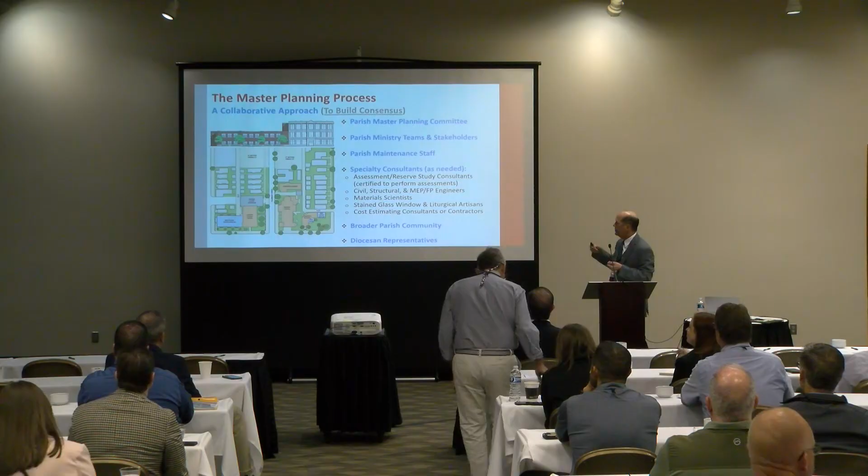Even including the parish maintenance staff and their history of knowledge of the buildings. But even the team that we tend to bring, depending on the extent of the master plan, some do require involvement of assessment consultants and engineering consultants, material scientists, artisans, and then the cost estimating consultants, so that everything we're giving estimates for is as accurate as possible.

But also even the broader parish community and then yourselves, the diocesan representatives, is sometimes overlooked. But we always have to remind our parishes that, hey, the archdiocese or the diocese owns these buildings, so they have to be part of this process. And sometimes we find that they try to avoid that and do projects without the diocesan overview.

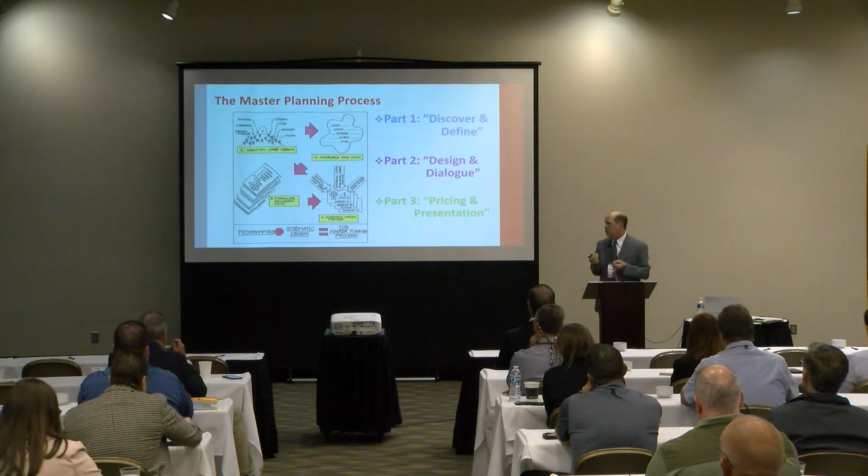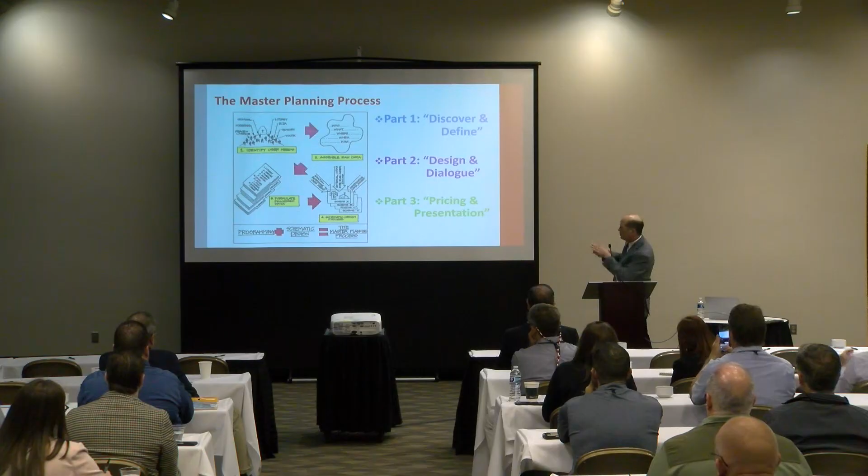About 10 years ago, we decided what's the simplest way we can summarize this process. And this is what we came up with, a three-part process: discovery and definition, design and dialogue, and pricing and presentation. I've color-coded my presentation accordingly. Other architects I've seen use similar processes with different terminology, but this is the terminology we came up with.

I'll start with part 1A, the discovery phase. That's really assessing the existing conditions, not only the physical conditions but also some of the challenges that parishes, schools, or clients have, including circulation problems.

I'll start here with more on the health, safety, and welfare side, the actual facility assessment and reserve studies. We've done this a number of ways ourselves, but in some cases, if it's a large campus or our team isn't necessarily the right fit, we bring in assessment consultants. One of these we'll see a little later here.

These are some documents from these assessments. We even start with a questionnaire before we begin the assessment, about the history of the buildings and any data they might have, including a questionnaire about handicap accessibility. These are just some of the highlights without going into detail.

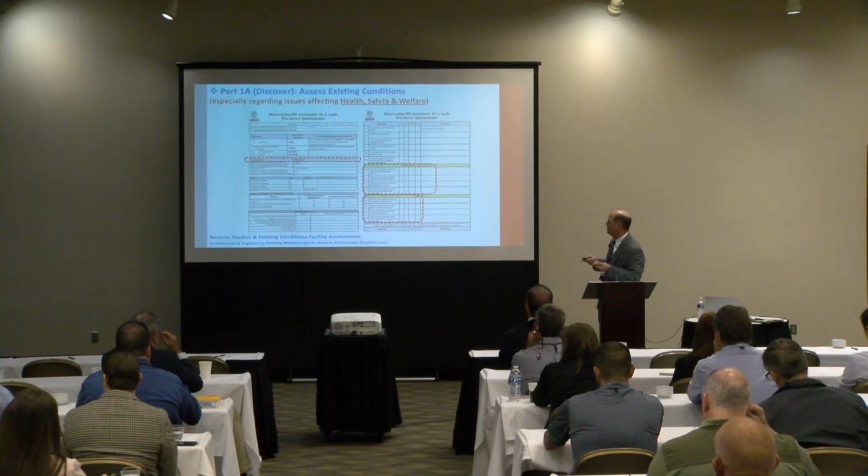The reserve study or facility assessment evaluates all the existing conditions, interior and exterior, especially regarding life safety and handicap accessibility. So thorough walkthroughs with ourselves and any engineers involved.

There's another talk going on right now specific to that, but this is a quick overview because it's a key part of a master plan. The worst thing we want to do is master plan for improvements that disregard maintenance issues and leaks in the building. We've seen buildings beautified over the years, but they didn't repair the roof leaks, so the new decorative painting in the church gets damaged because they didn't do a facility assessment to start with.

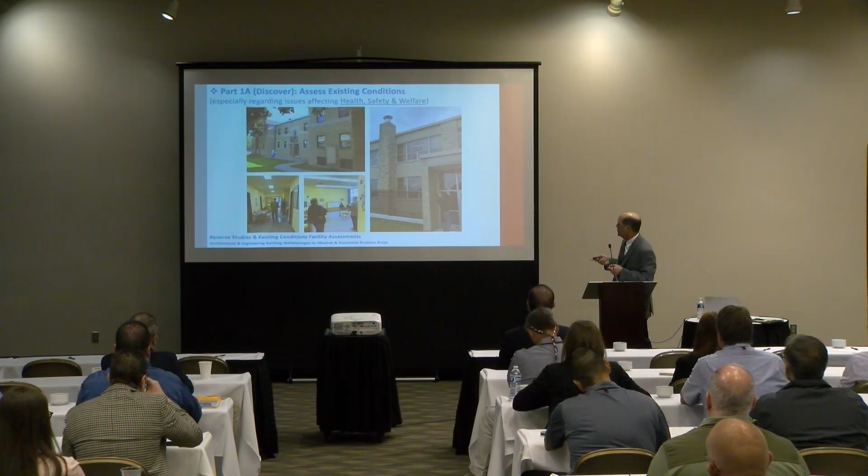Some of these images are all from the Cathedral of Indianapolis. We did an 8-month master planning process, long range.

These are specific zoomed-in photos that, in this case, an assessment consultant did with us, even highlighting health, safety, and welfare issues like exposed conduit and exposed cloth wiring—things that really need to be addressed and included in the cost estimating.

We also have artisans look at the stained glass windows and things like non-code-compliant kitchen hoods, which is a very common thing we find. And then, of course, all the masonry and roofing conditions that are letting water into the buildings.

With our engineers, they do their own specific assessments of all the mechanical, electrical, and plumbing systems, and we go up on the roofs. We have to cover as thoroughly as we can the conditions of the building, so we're fully informed as we start the design process.

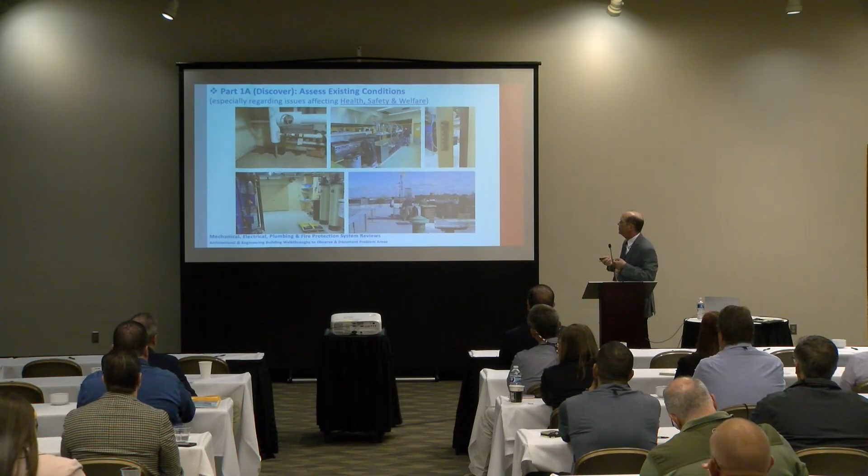Regarding handicap accessibility specifically, some of the things that aren't necessarily upfront or given to us as goals, we recognize as challenges when we start these master plans or schematic designs. This is one specific project with Brother John at the Dominican Priory in St. Louis that we're currently working on. One of the challenges is they have a handicap accessible entry, but it's not the main entry.

So they have an elevator here that was added, but their main entrance that most people come to for the first time still has these grand steps. So how do we navigate that? And how do we address that? And there's even steps halfway up this main corridor to the chapel, where most people go. So that was, we had a lot of discussion about that, but it was those initial walkthroughs where we noticed those things.

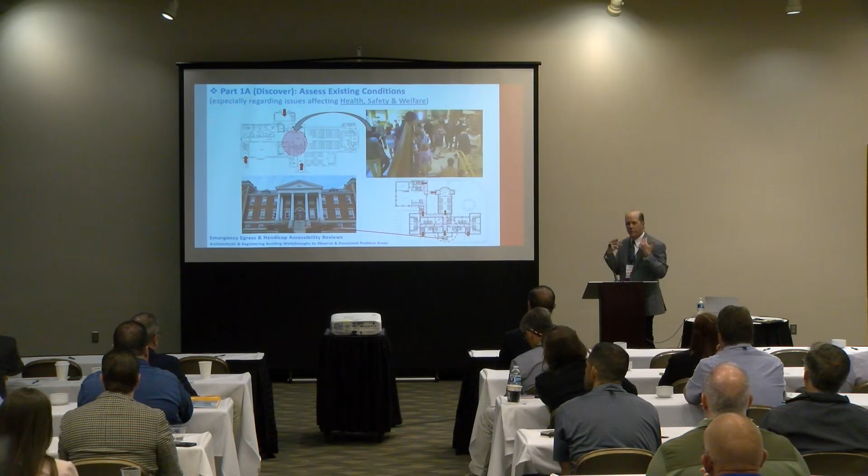This picture in the upper right is an example of a bottleneck condition that a particular client wanted us to address. They weren't sure what to do, but we had to go observe it in person, so we tried to go to liturgies or services. This is a Protestant church, right after one of their services. People are coming in and people are coming out, and they didn't have handicap accessibility with this grand stairway here. So we had to find a way to solve this design-wise, this bottleneck, but also the handicap access. Seeing those in person just brought it to life for us and really showed us what a big problem it was.

There were too many obstacles structurally and challenges, but it at least ruled it out, because if people ever asked, did you ever study that? Yes, we did. We did our due diligence, and it's not an option. So we had to find other ways to provide this large gathering space for the Cathedral of Indianapolis.

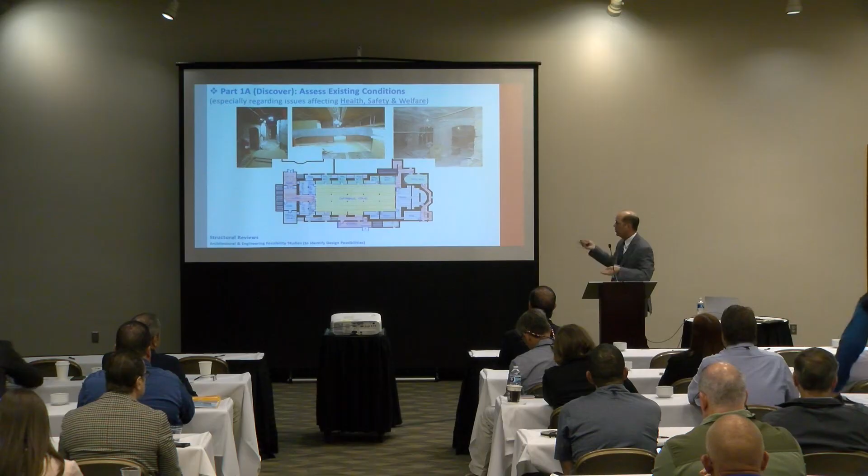And then, of course, all of those assessments, one of the key parts is a 10 to 20 year plan for how much money the parish or diocese has to raise over time to pay off and take care of those long-term maintenance items. In this case, at the Cathedral of Indianapolis, it was close to $5 million of work over a 20-year period. So long range, but significant deferred maintenance, and we had to keep that in mind as we designed the long-range master plan.

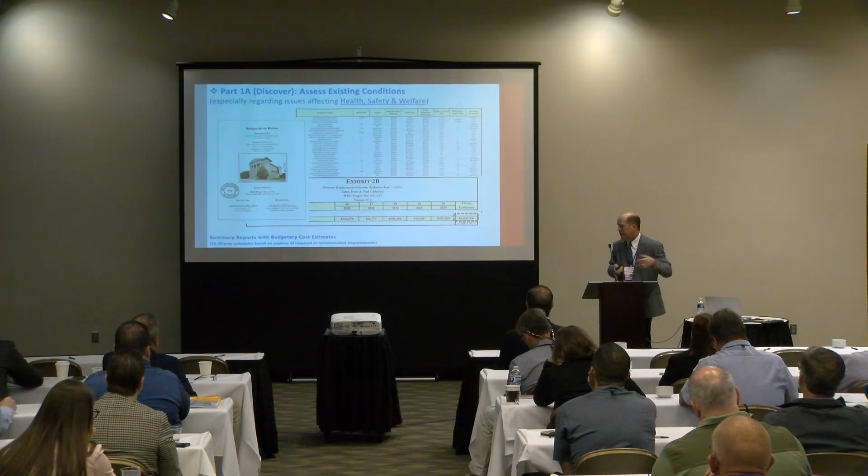This is one for a high school that we did near our office in Chicago. This is Bureau Veritas, the consultant I was referring to that does national facility assessments. What's unique about them is they have an online system. All of their facility assessments go to an app that facility managers or the parishes themselves can use to update as they do work, and they can keep it all online in a system that we found really made a lot of sense with current technologies, as opposed to just the bound assessments that we're typically issuing at the end of the process.

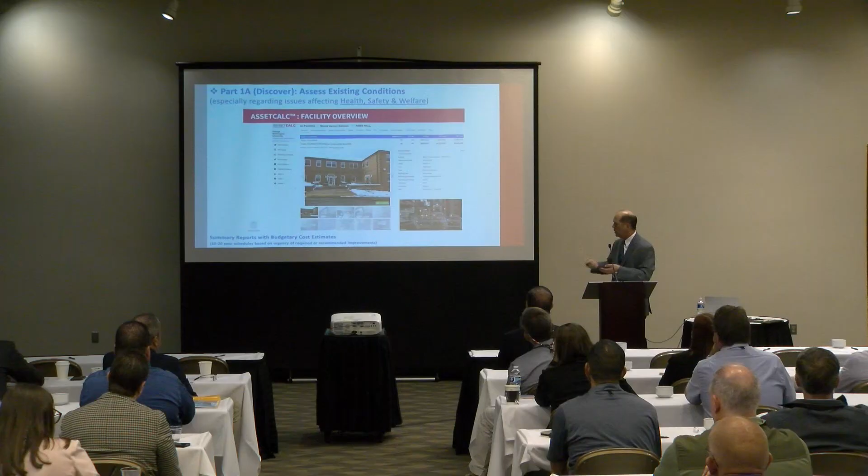Okay, so that's the discovery part of part one. Now we're in the definition phase, where it's really working with all the user groups and the building committee. Again, this is where the consensus building really starts in our process, with all the questionnaires and meetings face-to-face. So distributing hard copies, but also issuing digital copies. Sometimes we do Google Docs polls, which for people that aren't comfortable coming in person, makes it much easier to get information and feedback from them digitally.

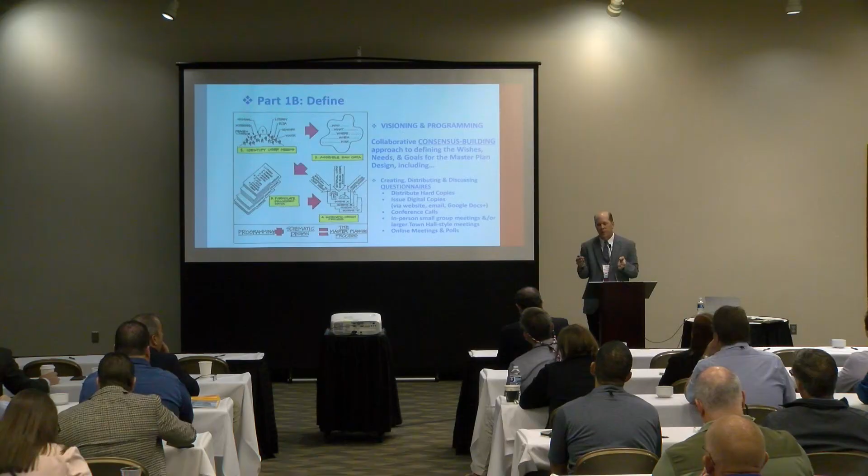So we used all of these methods at the Cathedral of Indianapolis's master plan, and gosh, we had so much information that we had to decipher, go through, and summarize. But it was really key to building that consensus. Everything from conference calls to user groups of 6 to 8 people, to town hall meetings in some cases for various projects. We'll do even a town hall at the beginning before we start the design. So really, it's different for every client we serve, depending on what the specific goals are.

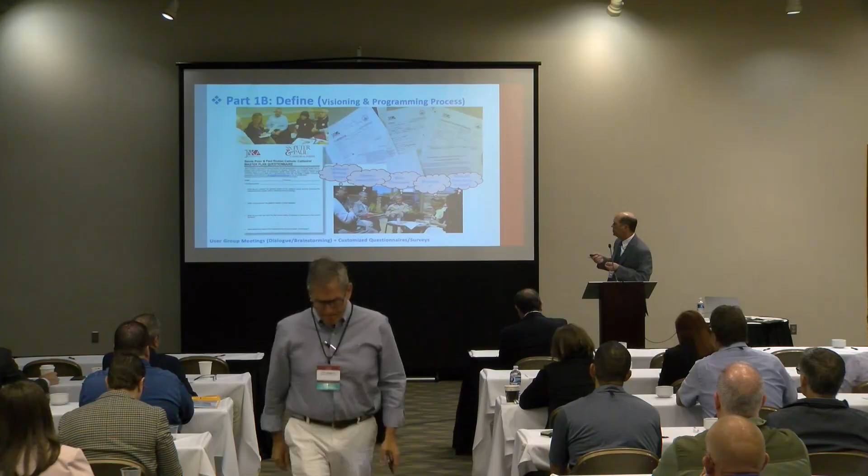And just some images of our questionnaires and sit-down meetings we've had. Again, sometimes these are put on the websites, sometimes they're mailed out, and then we get them all back by a certain date. But another thing we often do—in this case, this is a brand new church in the Kansas City, Kansas Archdiocese.

We actually issued floor plans, kind of diagrammatic from other projects we've done, to get feedback on traditional layout of seating and traditional location of tabernacle in center, or slightly off center but prominent, just because they're a unique parish that we're serving that's half Hispanic, half Caucasian. So the pastor really thought we needed to put these questions out there visually more so than just a narrative.

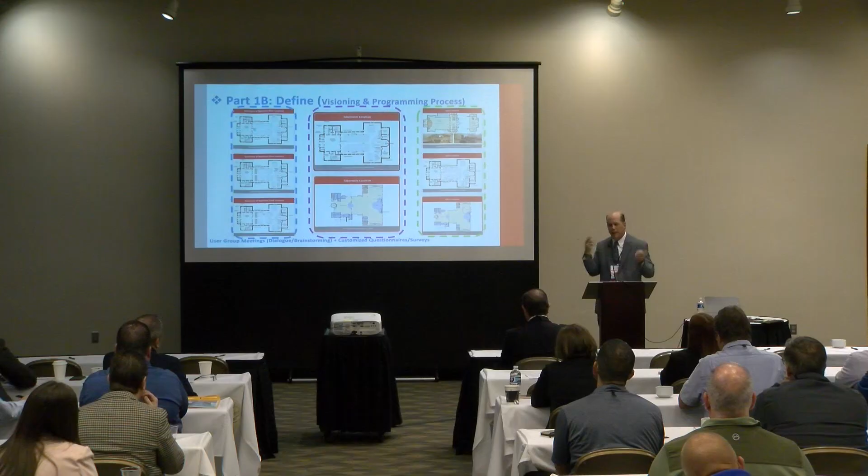So we did one for the location of the baptismal font and got answers back. We got one for the location of the tabernacle and even the choir location, and got a lot of data and feedback from each of those. Even though those aren't specific designs for their church, it just helped people visualize, and made it easier for them to understand and answer the questions of our questionnaires. This is just an example of one of the actual questionnaires for that project.

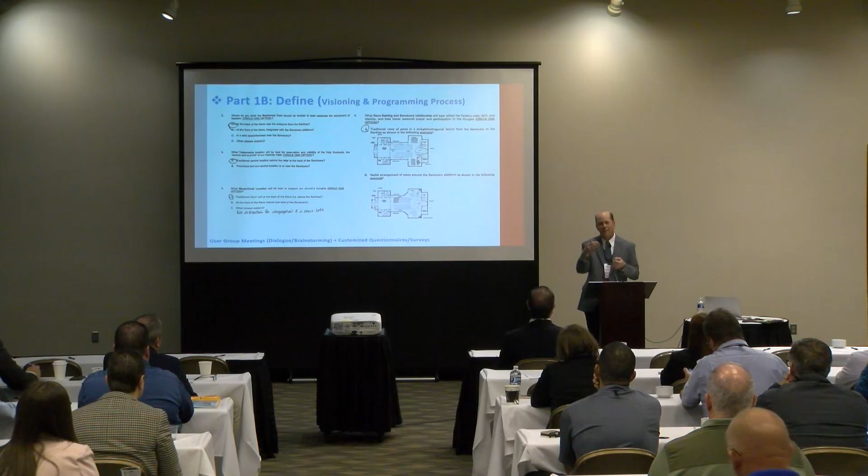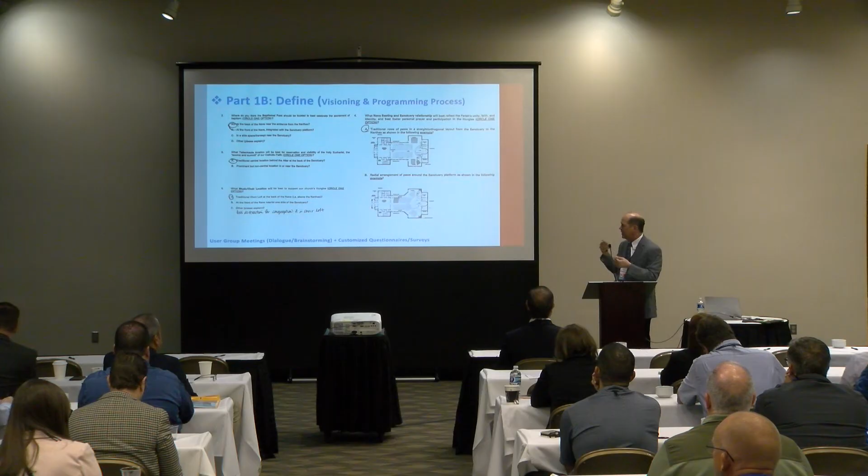And then Fernando, being bilingual, because they had so many non-English speaking members of their parish, translated those documents. So we got a lot of things back in Spanish. Having someone that can communicate with people that aren't necessarily strong in English has also been very helpful over the years. Fernando can instantly translate as he hears the speaking, and it's really been helpful for some of our church clients that have a high Hispanic population.

And then after we get all that data, we summarize it, and we do our best. It's always a big challenge: how do we succinctly summarize the highlights of all this information we're gathering?

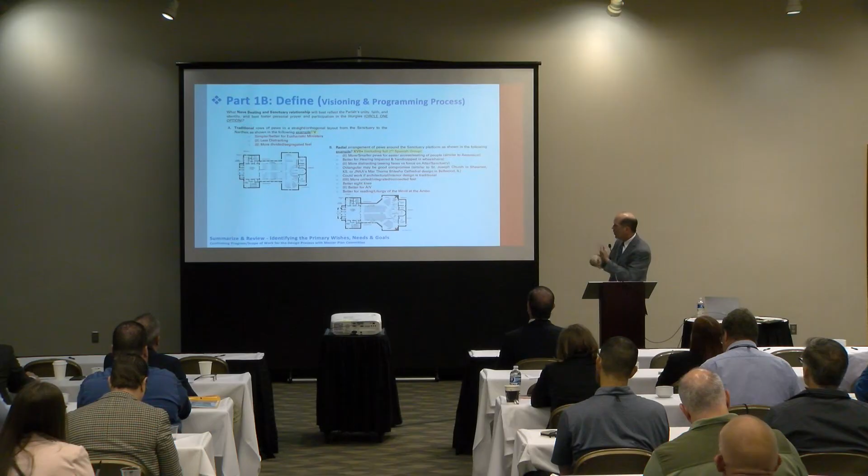And then in some cases we do quantitative analysis, so highlighted are the number of comments specific to a certain response. Without going into it, this is how we summarized all the data we got for that particular project.

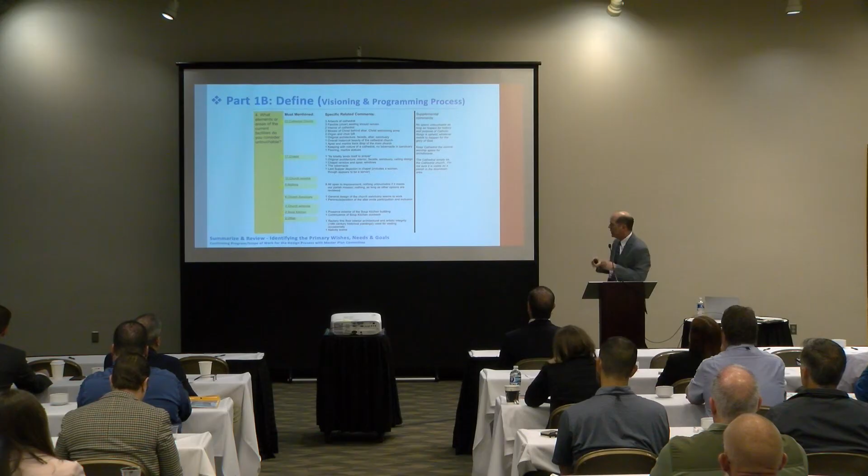And then for the Cathedral of Indianapolis, we did it a slightly different way. It's really catered differently for each project. We don't have a cookie cutter way to do it, because each project is unique. We've found how to best summarize each specific project in a way that makes sense.

And then we also summarize in some of the diagrams before we met with the building committee what we heard, and we point out what the preference was. In this case, with all the data we got, the preference was for radial seating as opposed to straight pews, and a choir loft, but a secondary choir space down next to the sanctuary because they have a Hispanic choir with contemporary instruments, but they also have a traditional choir that prefers to be in the loft at the back of the church. And then tabernacle location in the center, and the baptistry at the back, at the entrance.

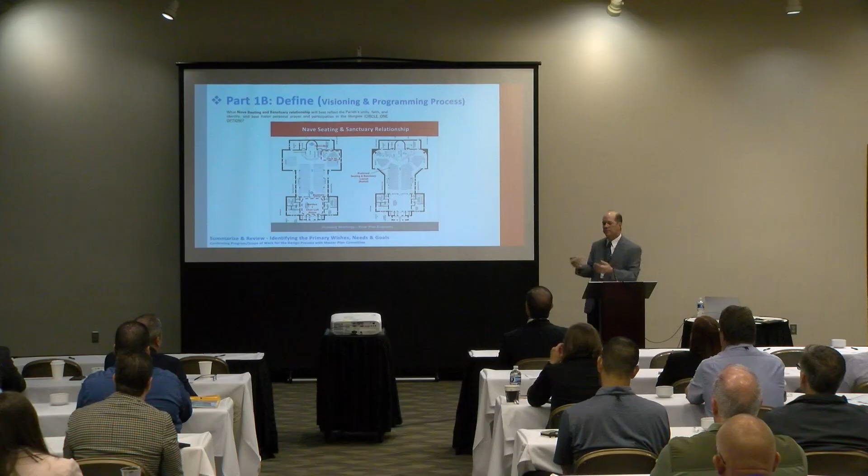So that was the summary of the most comments that we received, and that ultimately led to helping us efficiently design the new church.

And then we've also done these photographic summaries, overlays, and little bubble diagrams - in this case for a girls' Catholic high school, including handicap accessibility and just bringing an old building up to current codes. Life safety and handicap accessibility was one of the highest priorities in this case.

And then we even did a floor plan summary for them. All of these diagrams are really to get that core building committee's approval before we start design - confirming this is what we heard, and is this what you are giving us authorization to then start designing toward? In some cases, they'll say no, we ruled that out years ago, we know we've already studied that. But it's basically us summarizing what we're hearing.

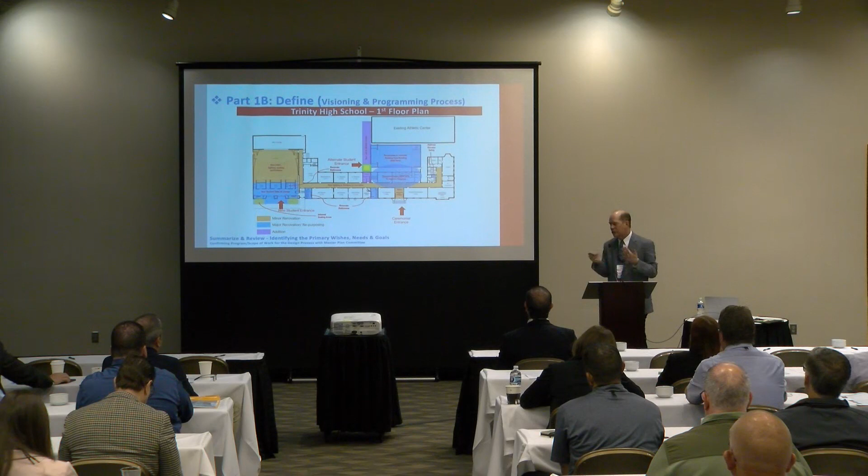It's very rare that we're overruled. Typically they defer to what the data says, because if they want to build consensus, they've got to listen to all the groups as well - the parish, the school, or whatever the group might be.

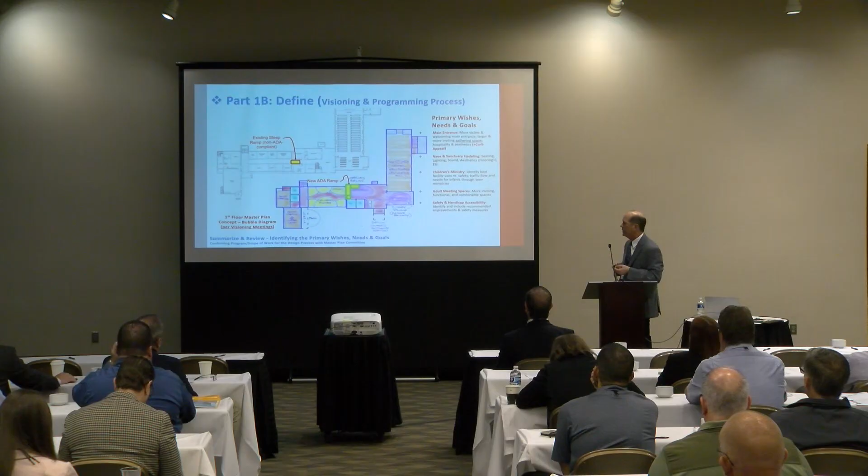Just a few more examples of very simple bubble diagrams - these are digital sketches over a digital floor plan. In this case, one of the big problems was handicap access - this terrible, very steep ramp right off their main corridor. So in addition to repurposing a lot of spaces, navigating that handicap accessibility was something we really had to identify right up front and confirm was a high priority from all the information we received through the visioning process.

This is a site plan diagram I did to summarize the new church in Kansas, probably our earliest site plan. Their original civil engineer site plan for zoning had the church oriented just parallel to the school. With all the feedback we got, this is the idea I came up with - it really wants to have a more prominent entrance that addresses the entry. This was a simple way to express that before we launched into schematic design.

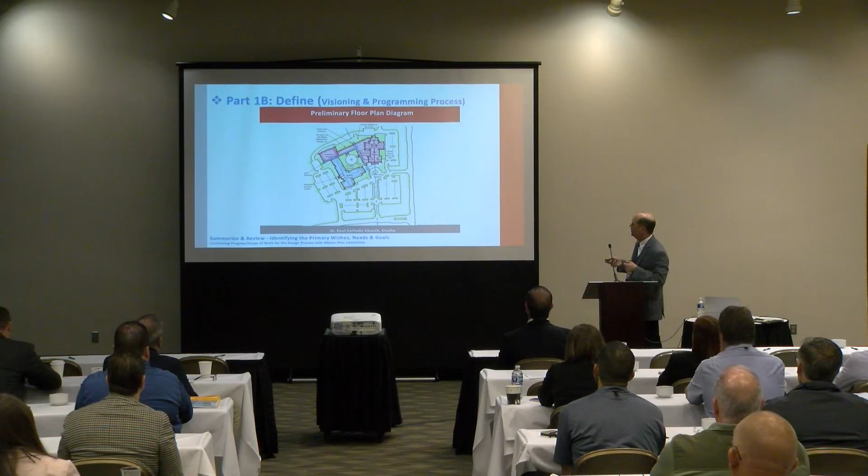We also do, not all the time though - we don't always do a program specific to each space, I'd say about 50%. You'd think entering the profession that a building program was always a given, but it's amazing how often that's pretty general. In this particular project, we did have a very specific building program because it was a brand new building, so we had to identify all the square footages of every space that was necessary.

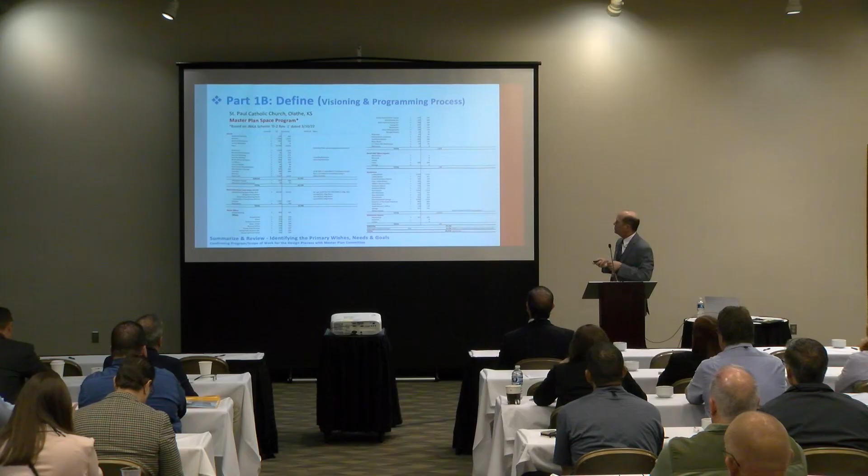So that's the visioning and definition phase. Once the building committee or diocese approves that, we get the go-ahead to develop the design phase, the second step in our process. That's really where we go to the drawing board and start to develop our initial conceptual designs - the part architects are typically known to do.

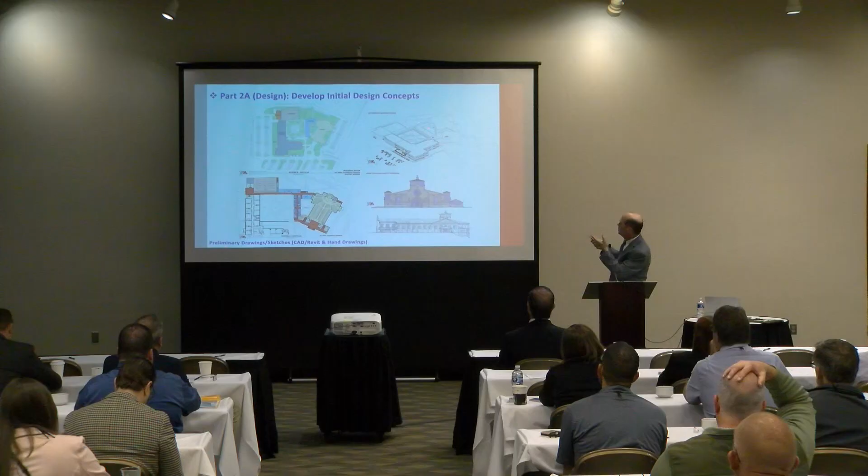For most of our projects, I still work by hand digitally on tablets, but most of the younger architects now go right on the computer pretty quickly, especially with a basic concept. These are examples of things we've done to prepare for first design review meetings - site plans, floor plans, and conceptual elevations. These are scanned hand drawings for a brand new church, the church in Kansas, with simple massing studies for how a new traditional Catholic church would relate to an existing school building.

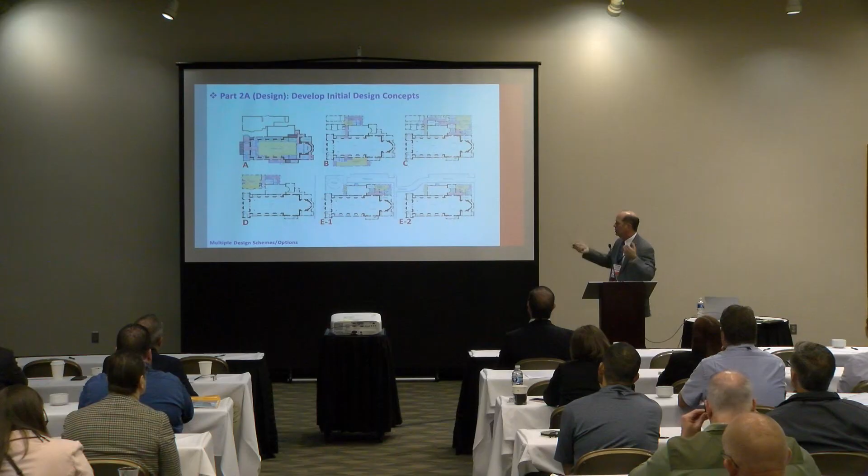We also typically develop multiple schemes, again to build consensus - we have to provide options to give people more ideas to respond to. We've found we just can't come with one idea, because it's going to take longer if we just say 'this is the design, how do you like it?' We've learned over the years that we've got to bring multiple schemes. For the first design review meeting for the Cathedral of Indianapolis, I developed 6 schemes, which is a little excessive, but there were all these ideas from the visioning process that we had to translate, if only to rule them out. We felt we owed them this range of ideas at that first meeting, considering the long-range goals of this project.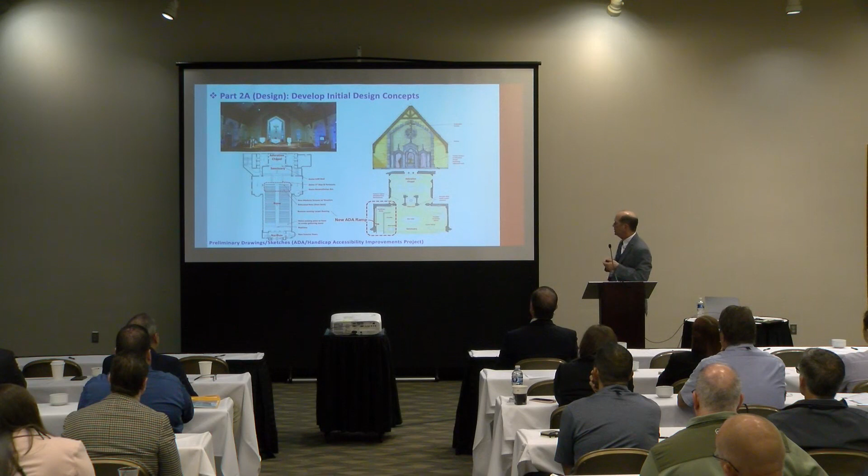In terms of this church, handicap accessibility to the sanctuary was a significant issue, but also removing a very modern intervention after Vatican II, including this reredos wall in a traditional Gothic church that they wanted to remove, wanting a reredos more in line with the original design of the church. These are our initial sketches to get those ideas on paper and start addressing some of the accessibility needs and how that gets integrated with the design.

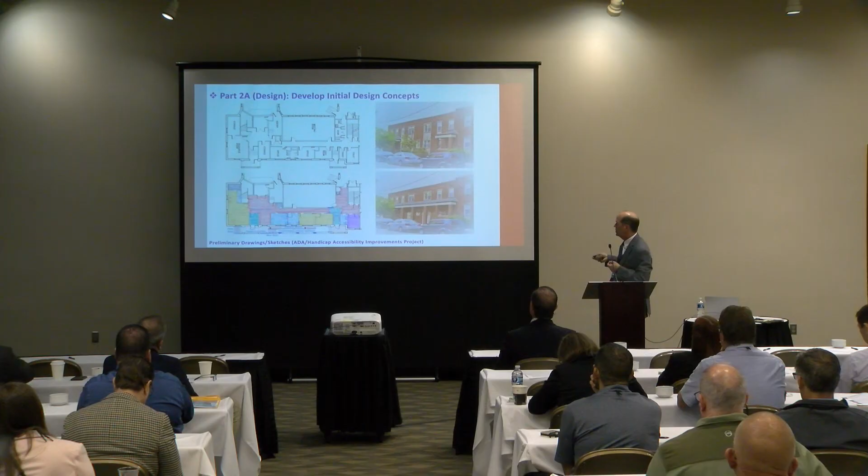Another range of sketches - photographic overlays, floor plans, etc. Another one where handicap access was a major issue - they have steps right inside their vestibule and a step here. How can we make this a handicap accessible lobby into their daily chapel? This was just a conceptual idea at the very beginning.

And then a full accessibility project, in this case an elevator addition. So in some cases we go right to our BIM program, Revit, because we had a very clear idea from a very simple sketch, and it was very floor plan driven. At our first meeting this was what we presented, because it was simple enough that we could jump right into using Revit to develop this idea. And that's the elevator tower, of course.

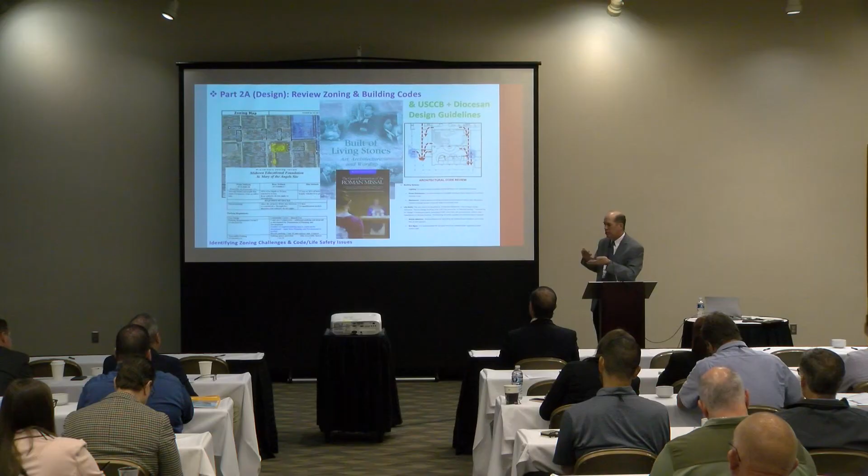Concurrent with developing those initial concepts, we have to be sure, as architects, we meet zoning, building code, but also the diocesan liturgical requirements and the USCCB Built of Living Stones requirements, if it involves renovation of a church or a new church, et cetera. That's happening in parallel, because the worst thing we want to do is show something that doesn't meet those requirements and then have to make changes down the road. So that's part of our process too.

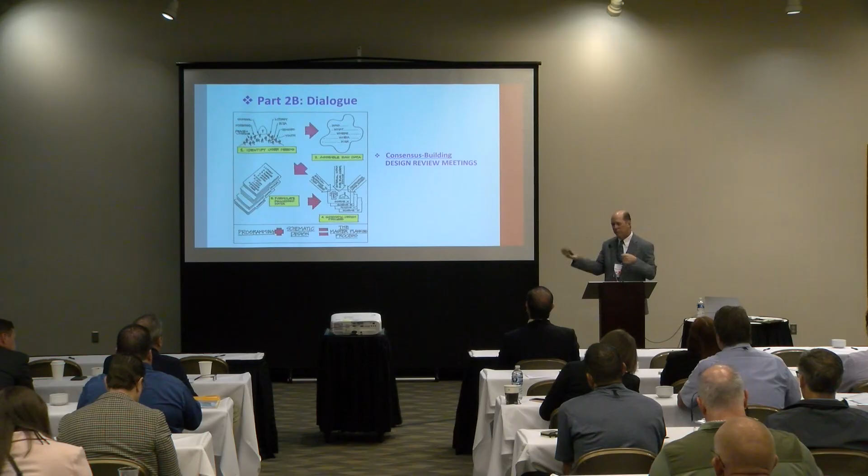After we develop those concepts, again focusing on consensus building, we hold design review meetings. We typically propose at least three for a significant size master plan. In Indianapolis, we ended up having four over, I think, four or five months, where it's back to the drawing boards with comments, then come back again three or four weeks later. So it's very collaborative with the building committee, once again, all focused on building consensus.

Just some examples, this is a really old one from before I even joined the firm, back in the day of pinning up the drawings and vellums on the walls, to obviously doing things online now, using our laptops and presenting digitally. But basically using whatever the best technology is that we can use to convey the ideas and get the feedback that we need. And at those meetings, we mark up our drawings.

These are literally some of my markups of feedback I was getting from the building committees, just having dialogue with them and listening to ideas that different building committee members have, all towards building consensus.

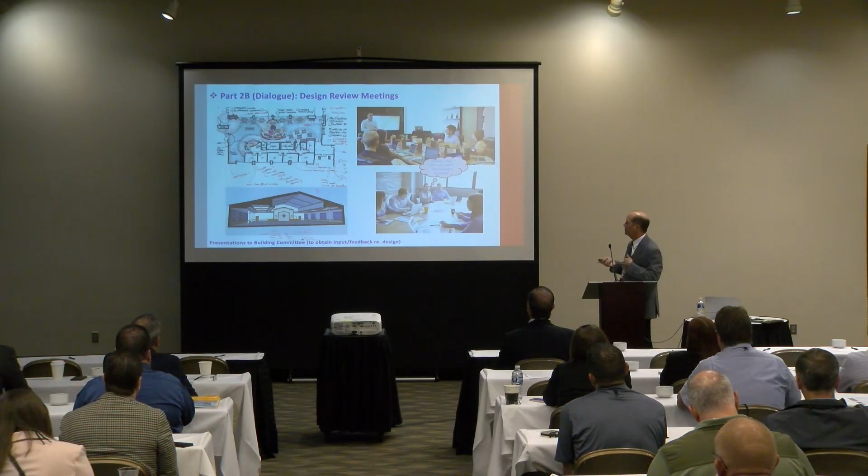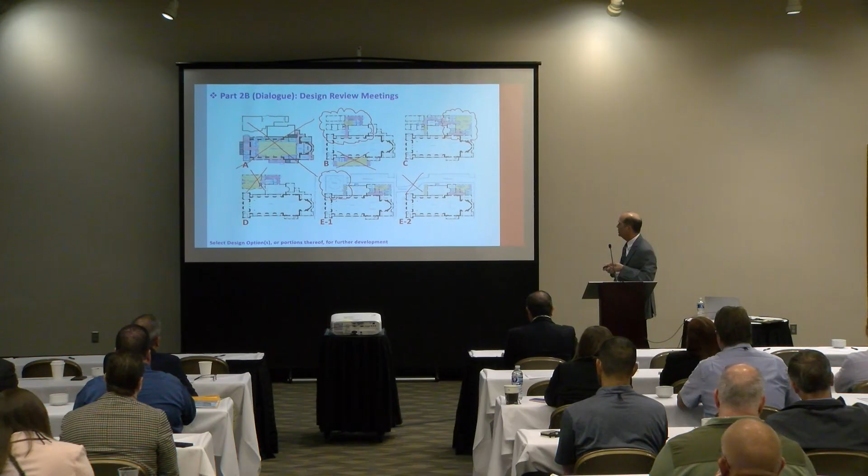In the cathedral's case, there were pieces of different schemes that different people liked. This is just my markup from that first meeting, and the final scheme ended up being parts of different schemes.

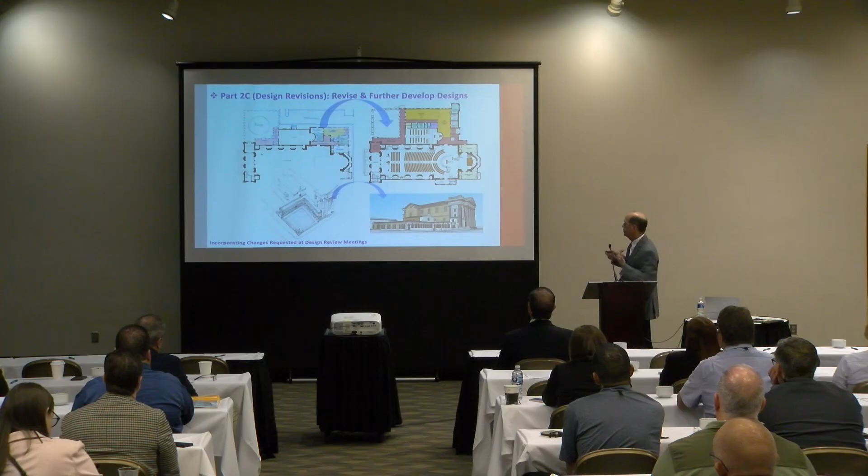Hand sketches, and this is the Cathedral of Indianapolis once again, become 3D modeled computer drawings. And then those ideas change pretty significantly — this evolved a lot over time.

This wasn't a dramatic difference between these two meetings, but you can see how it got more and more detailed, and the colors and finishes were a big discussion point. Going from stone to wood was a big decision. And then how does that ramp get integrated so it blends in with the architecture, because ramps are hard at sanctuaries to hide, and that's a common challenge we have to integrate sensitively.

Even this elevator addition didn't change a lot, but developing the exterior paving there to make that a destination in itself before you even go into the building was what came out of that first meeting.

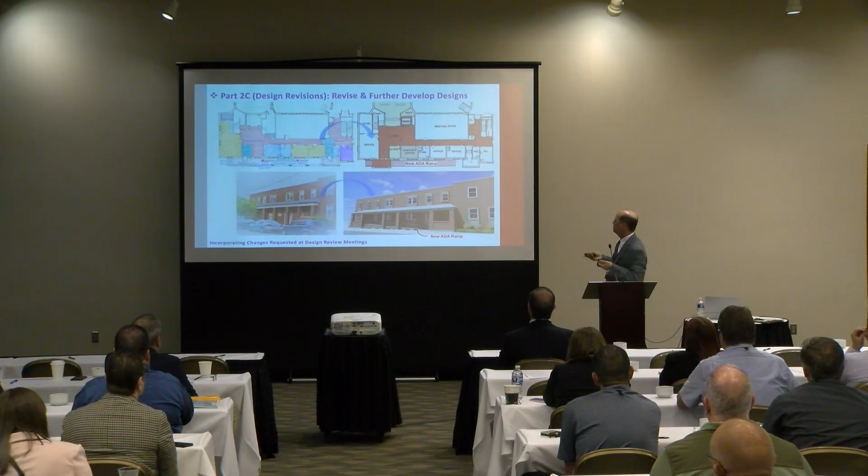And then just how these other projects evolved as well — how does this ramp look behind these cars? I didn't show the ramp, but this view obviously conveyed that idea more clearly visually. And they ended up adding an elevator inside to make the whole building accessible in that case.

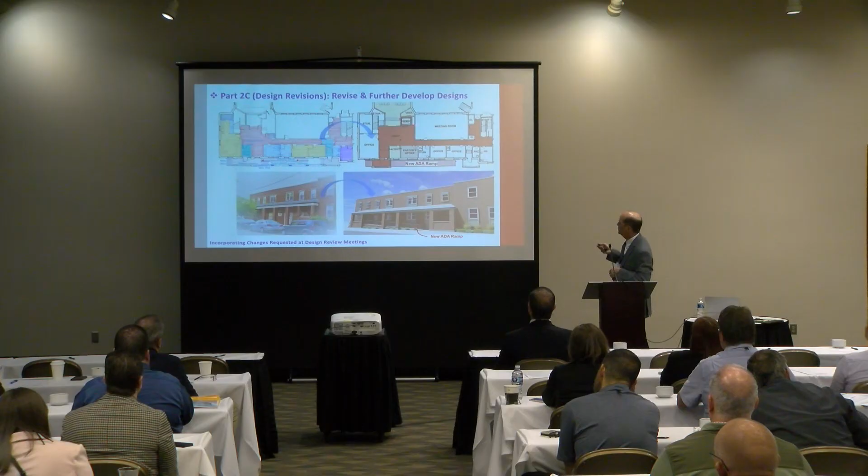And on the new church in Kansas, it went from just the church elevation studies to the full master plan studies of how the other buildings looked on the outside, now that they were happy with the church. So we had to do preliminary sketches of the entire campus, of what's expanded in that full master plan.

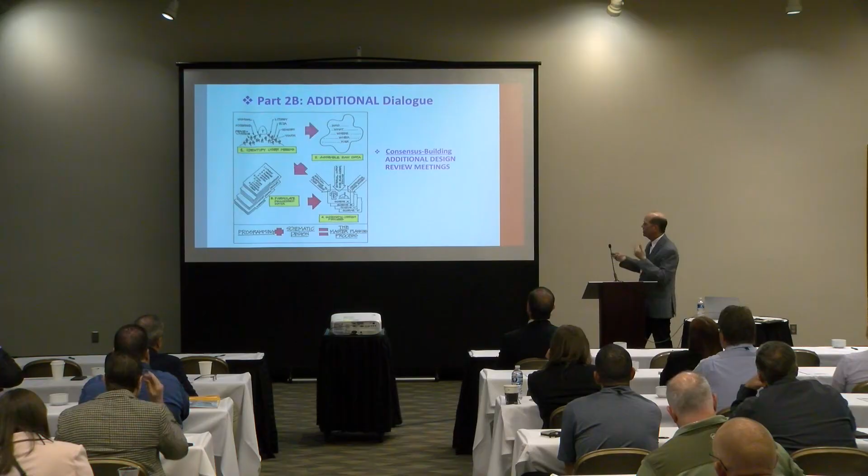And then, as I mentioned, we go back and forth, having those additional meetings to review those again and get more feedback.

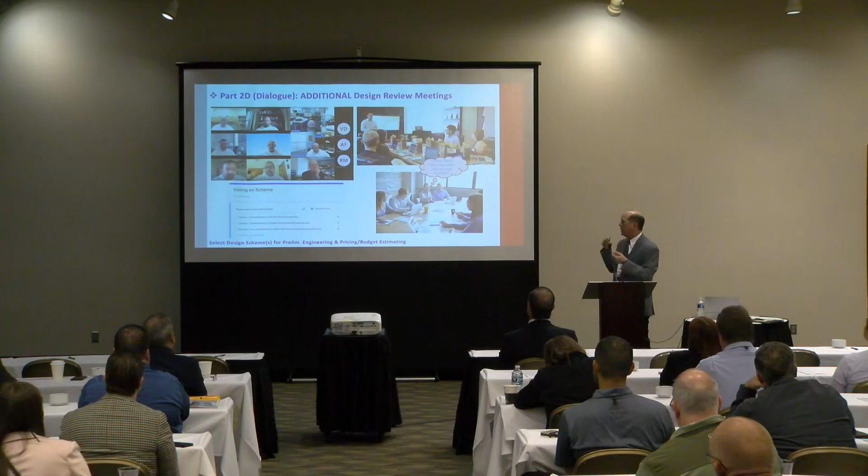And more recently, since COVID, we've been doing more and more of these online, especially for projects where we're not physically in the city we're working in. It's been amazing—I assumed in Kansas I'd be going there every other month or so, but it was better for them to meet online. As a committee, it was more flexible for them.

Brother John and his group from the Southern Province and the Central Province, the Midwest Province of the Dominican Order—this is their group from two provinces, about the project we're doing in St. Louis. One unique thing we did with them was an online poll live during a meeting, to achieve consensus on a major decision: should each of the bedrooms have a private bathroom, or do we do dormitory style bathrooms? The live poll helped them make the decision for how we should move forward as architects on the design before the next meeting, which is next Monday.

And then the ultimate end at the last design review meeting is deciding which schemes you want us to do a cost estimate for—that pricing exercise. Often we're asked to price two different schemes, because they're still not quite sure which scheme might be the best.

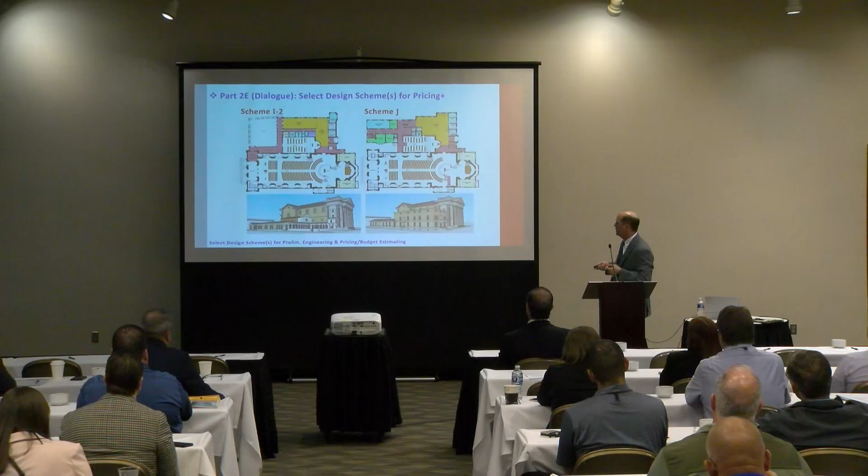At the Cathedral of Indianapolis, we actually priced a scheme that kept the rectory and renovated it, bringing it up to current codes and addressing all the deferred maintenance, versus the idea of demolishing it and opening it up to create a little mini St. Peter's Square at the corner as an entry to the cathedral. So we got full estimates for both of those schemes.

And back to that school project, traditional or modern—they actually said it might be too expensive to do this new building, and that we should price an option to do it as an expansion of their current building. So they asked us to do another little master plan concurrently and price both options, because this just ended up being way too expensive for that particular parish.

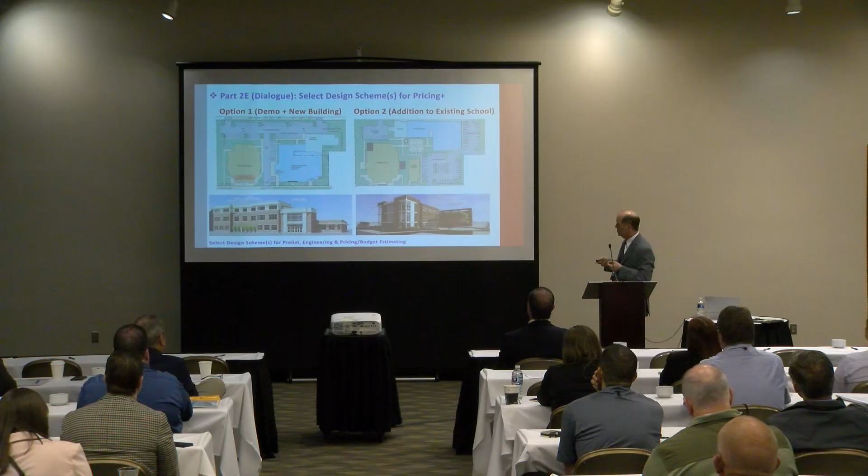And this is for my own parish—just some of the renderings we did for the pricing exercise there, and also for fundraising purposes, both interior and exterior.

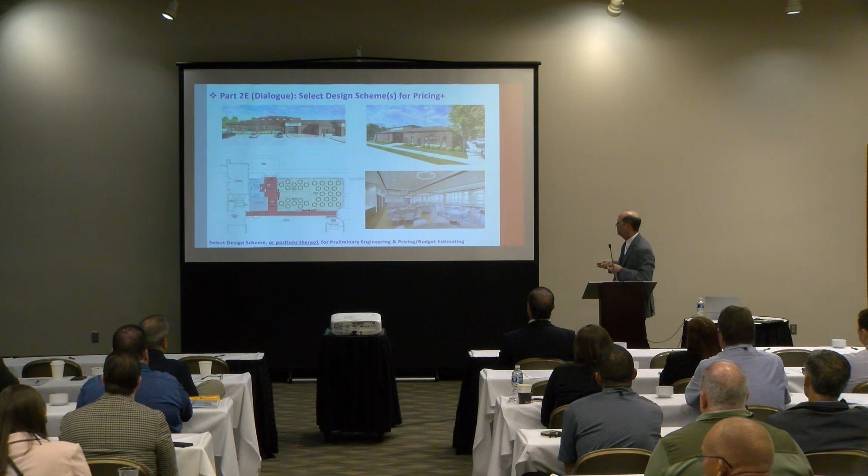And then all of that leads to doing those preliminary cost estimates. But a big important part of that is doing a basic level of engineering, so it's not just a cost-per-square-foot budget estimate—we typically try to get design-build mechanical, electrical, and plumbing engineers to do basic conceptual estimates.

And in some cases, for larger projects, we have consulting engineers do preliminary concepts, just so it's a bit more thorough of a cost estimate from the contractors.

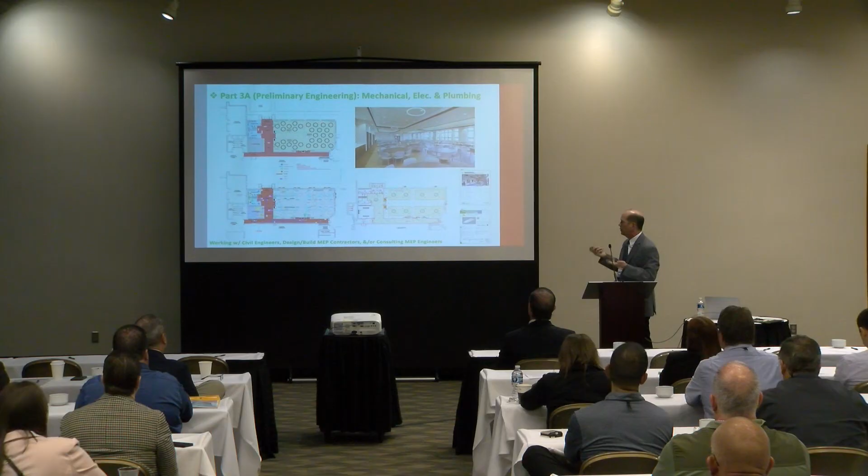These are some examples of the mechanical, electrical, and plumbing drawings that these particular contractors did for us as part of that process. For the new church in Kansas, our mechanical engineer did zoning studies showing all the zones, plus very traditional MEP concept drawings.

And similarly for civil engineering, just some of the basic grading and utility plans, and some graphics—in some cases the engineers help us with the budget estimating. Our civil engineer, in this case, gave us budget estimates that simplified the cost estimating process.

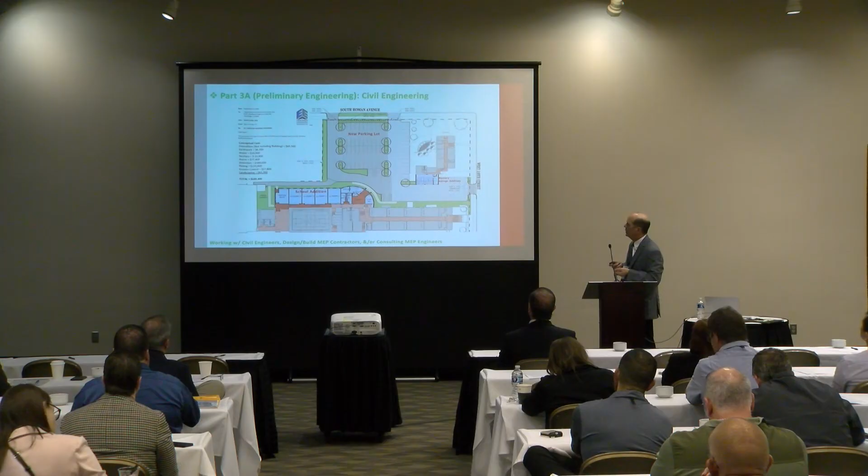In more cases, it's typically working with a general contractor that's qualified to do these types of estimates. For the Cathedral of Indianapolis, Bulley & Andrews, a regional contractor based in Chicago with an office in Indianapolis, did very thorough estimates based on floor plans, elevations, and 3D models, with a lot of back and forth by email. This is one of 15 pages of breakdowns.

So this is just a brief summary of the numbers.

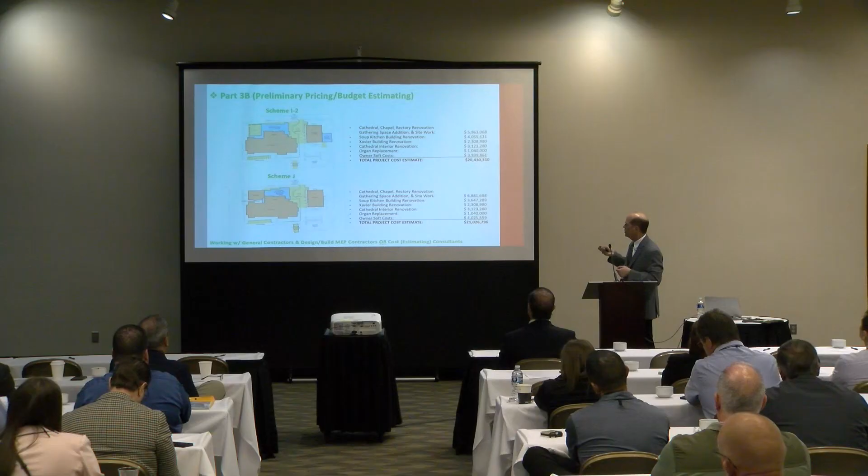Then there's phasing. How can this project, not being built all at one time, be broken into phase 1? The sequencing comes from the contractor's input on the best way to achieve this goal over time methodically, so we don't have to undo work in phase 2 that was done in phase 1. That's another reason we recommend getting contractors involved early, because they add a lot to those decisions and conversations.

How do you engage the contractor? Do you pay them, do they get a contract for pre-construction? A lot of contractors we work with are willing to do it on a pro bono basis if they have a chance to build a relationship, are considered for pre-selection, or know they'll have a leg up on competition if they bid later. But we typically encourage our clients to pay them for their effort. I'm amazed how often they say no, they want to build a relationship instead. In some cases we work with a cost estimating consultant to avoid that.

In the Kansas case, we actually did both. They initially worked with the contractor that built their school, but later asked us to bring in an independent consultant for a later estimate during schematic design. They just weren't comfortable—they thought they were asking the contractor to do too much work, and we agreed. In the end, that contractor didn't even get the project, so it's good they didn't keep asking them for estimates.

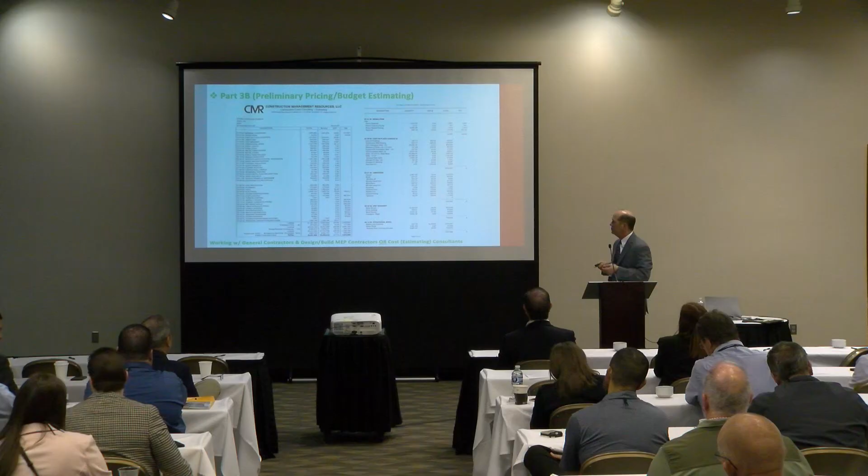A big part of the estimate is also all the soft costs that a contractor isn't going to estimate—that's where we and our design team come in, so you have a total project cost estimate instead of just a budget estimate for hard costs. We've seen soft costs and owner furnishings be as high as 30% of total project cost depending on furnishing levels. Typically it's in the 20% range, but it's significant enough that this is a really important part of the cost estimates.

Again, with the theme being consensus building, it's hard to build consensus when you don't have accurate budget estimates that are thorough, complete, and with thorough breakdowns. People don't tend to trust just the single line cost-per-square-foot estimates. At least that's what we've learned over the last 20-plus years.

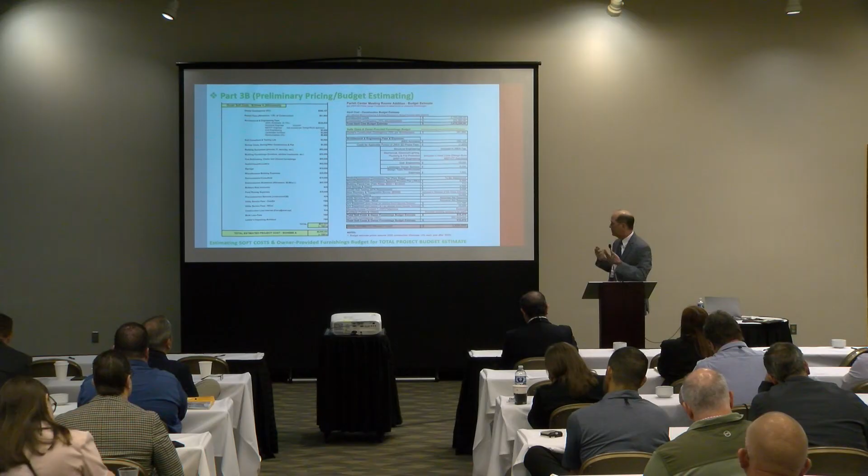What are you seeing in your region nowadays for cost per square foot when you do detailed analysis, where do you come in roughly? For traditional Catholic churches, we're in the $400 to $500 a square foot range for total development costs, including soft costs. It's more like the $500 range for total site development, interior furnishings, and the building itself.

So it's significant. In that particular project, I think there are some slides about it—the first estimate came in at $30 million after we finished schematic design, after the master plan, where we further developed it with more engineering. It came in at $30 million, but their budget was $20 million. So then that's a whole other discussion about value engineering, but that's our job as architects, to design to that budget.

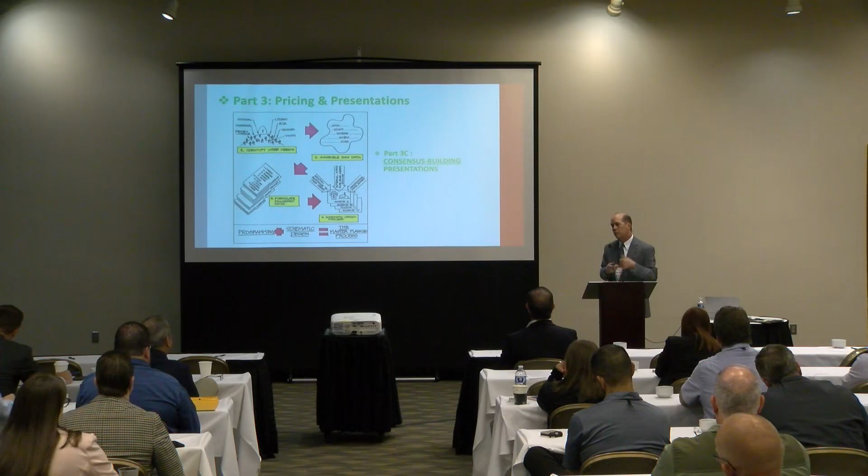And so we had to find creative ways of bringing the numbers down, and we achieved that. It's under construction now.

Okay, so another key part of the process is the broader community, the town hall meetings, or the larger committee meetings with more ministry teams to basically share those ideas that the building committee itself has approved. Now it's time to get input from the broader community, because if they're not involved and don't have a chance to voice their opinion, how are they going to be part of that consensus and agree to whatever the ideas are?

In some cases the building committees themselves lead it, but more often than not we lead it as an independent person. That way, people feel freer to talk to us, vent to us, ask questions, or share their disagreements in some cases.

And sometimes the design does change after these town hall meetings. Sometimes we have meetings with the building committee again, like, wow, that was not what we expected - we should rethink this, maybe scale back or add this program element that we didn't get from all the questionnaires. It's a really important step that I'm surprised how often different clients of ours don't choose to do, because we always recommend it based on our experience. But in some cases they say no, that could get out of hand, we need to keep this simple. So it's interesting how different clients have handled whether or not to do the town hall meetings.

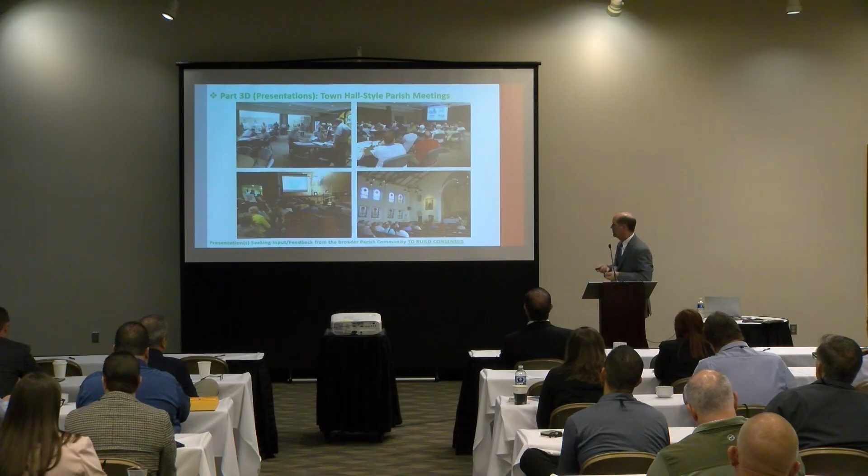In this case, the town hall meeting was outside on a lawn - a little evangelical church that we designed a new building for displayed our design outside, and they had a kind of town hall meeting behind the house that's selling the property for the new church. It was a very unique town hall meeting style. It's Front Porch Church, so it was certainly appropriate there.

In some cases, like for schools, we'll meet with the student body and share with them, because sometimes only a few students are involved, but showing it to the broader school community has also been really helpful, because then they take their feelings home and share it with their parents. So we think there's a lot of value in having the student body as part of that process.

At what point does too many stakeholders become diluted? That's a great question - at what point does having too many stakeholders dilute the process?

The biggest one that comes to mind is the Cathedral of Indianapolis. There were stakeholders across the archdiocese - it was a whole archdiocese-wide effort and goal. Between the conference calls, it was hard to keep track of all these groups they were involving in the process, but it ultimately all came down. It just required more time for us to filter, review, and summarize. But it was summarized and ultimately led to a list of goals based on what we heard. I don't think it was problematic to have more stakeholders or more groups involved, it just took a bit more time, if that makes sense.

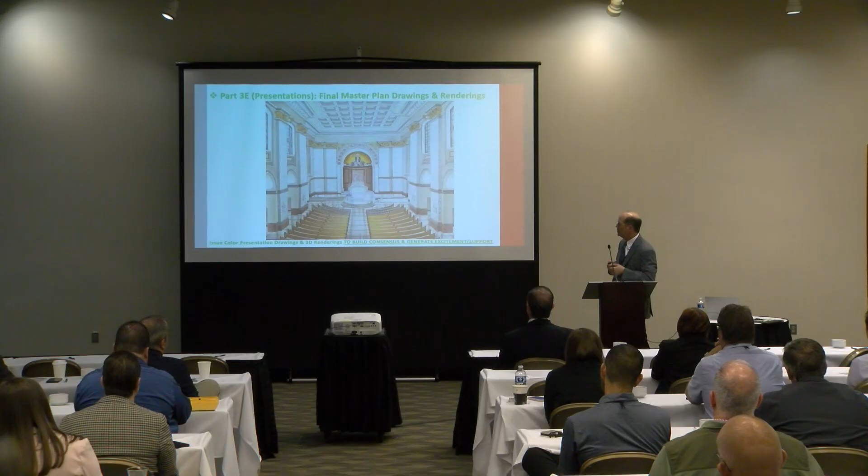An artisan, Daprato Rigali, really captured the design. They were pricing some of the marble for us and stained glass windows, and I had done a little photographic overlay sketch, and they offered to do a watercolor of that for us. So Rigali did this to summarize our design of the interior. That was a great contribution from one of the artisans on our team.

And then for the church in Kansas, these are just some of the final 3D renderings from those initial sketches we did early on that captured the final design of that master plan.

That's in Olathe, Kansas. This conference is going to be in Kansas City, but on the Missouri side. I mentioned to one of the CCFM people last night that we should go see it, since it's going to be finished next April, kind of like Cincinnati here. I realized it's a different diocese, but I was hoping we could get a tour of that since it'll be open next year.

Use these final renderings to really show off these views and use for fundraising purposes.

Is there a feasibility study done on the front end to see if the parish has the capacity to raise the money to do these? Sometimes these renderings can be beautiful and everything, but the capacity of the parish or community isn't there, and they get disappointed when there are cutbacks and the final result isn't able to present exactly what they saw in these renderings.

Yeah, no, that's a great question. We recommend that they do, but not every parish or diocese has done those feasibility studies, and that's often a question we ask: is there any budget we need to design toward? We hate to design these beautiful buildings and then find out there's no way they can afford it. So we do our best, but it's interesting how often that happens. We highly recommend it, but in some cases that's kept private from us for some reason, and we don't know why.

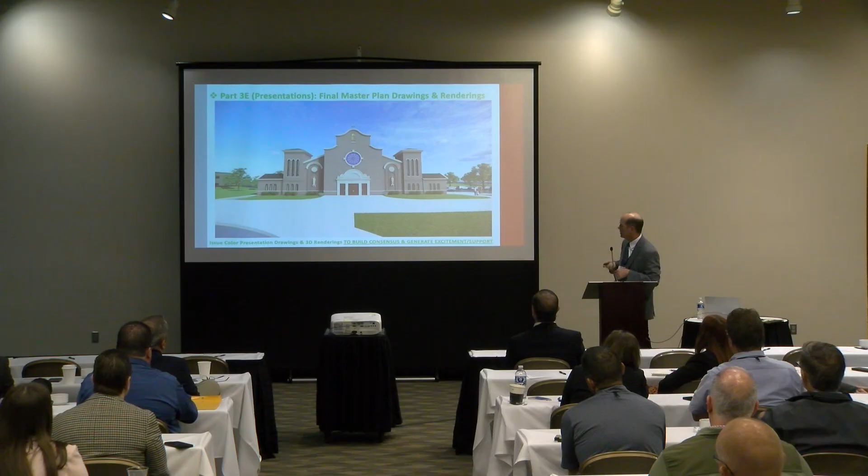And then here's the final interior design for the most part of that interior. They had to end up phasing the build out—there's a whole lower level parish hall that they needed new offices for, but they can hold off on that hall and use the current, former school space, where they currently have church, as their hall temporarily. So that was another way we helped get the numbers down, doing a partial build out of the lower level, but still the full interior build out of the church itself. So that's why they can still use this rendering for fundraising.

And then different views on the inside of this. And then the other church I showed earlier with that ramp and the reredos.

This is one of the designs at the end of the schematic design phase. These are the renderings we used there to build consensus and excitement. And then COVID hit, so we had to simplify this even further after COVID. But for the broader master plan, these aren't Revit drawings—just quick hand sketches that we did. And then they have a little new freestanding adoration chapel they want to do at some point, so that was simple enough we could do that in Revit.

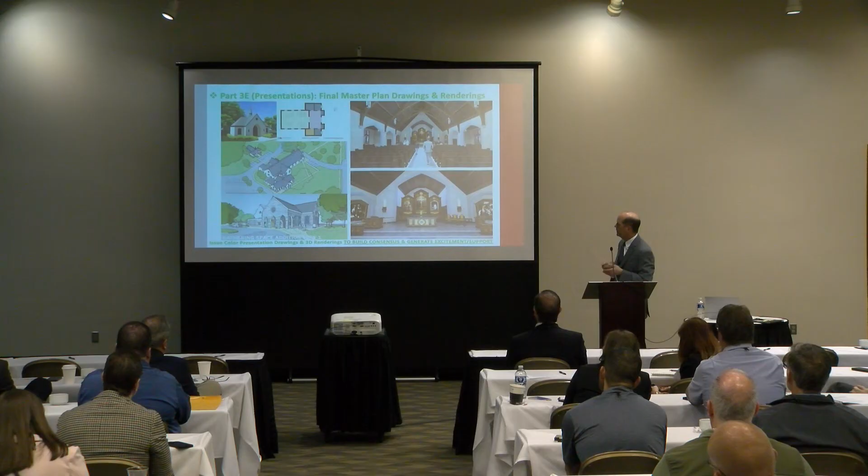So we use different technologies to convey the ideas, basically. We don't do it all one way.

And then for this particular one, we did animations—walkthroughs and flyovers—using BIM technology in Revit, plus add-on programs. Enscape is one that we use. We can do these much quicker and more efficiently than we used to. It used to be cost prohibitive, but now because we model everything, it doesn't take a ton of effort to then do an animation of it.

On our website, at the bottom, there are some examples of animations we've done for a few of our projects, and I can show a couple if we have time. That's super effective for building consensus—people can visualize it that much more and get excited, and therefore support it financially.

But we still issue a bound summary of all the documents, so there's a record of how the design evolved from the first design review meeting, but also even before that—all the facility assessments, the reserve study—depending on the extent of the project, in a bound book or digital formatted documents. So that's all part of the final deliverables as well.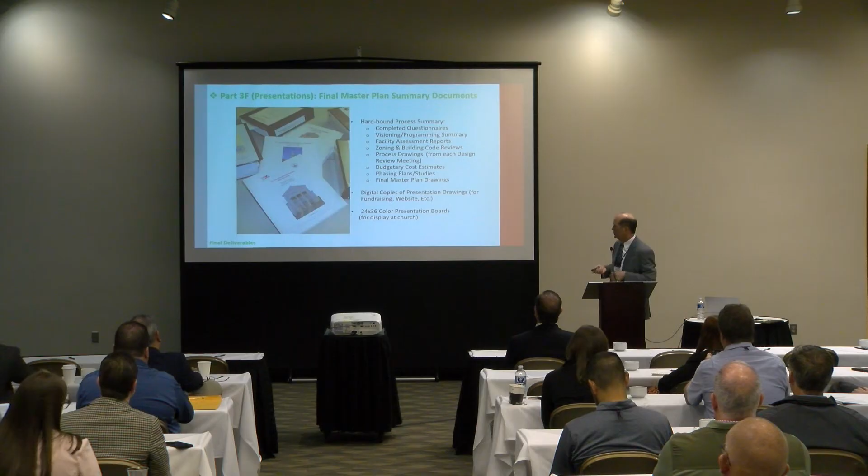And then contractually, typically we had done these simple letters of agreement in the past. The previous president of our firm wasn't as concerned about liability, but as I became a principal and president of our firm, contractual concerns started coming up more and more with our liability insurers, and even some of our clients—different dioceses—require AIA contracts.

So we use the B102 in Kansas. I think we also used it in Indianapolis, if I remember right. But there's also, if anybody's familiar with the Association of Licensed Architects—we're members of both—they have even simpler legal contracts prepared by attorneys, shorter than the AIA contracts. So we've used those on occasion as well, typically for smaller projects, but it's helpful to have a simple legal agreement at the start of the project, which ultimately evolves into more detailed agreements, whether AIA or ALA.

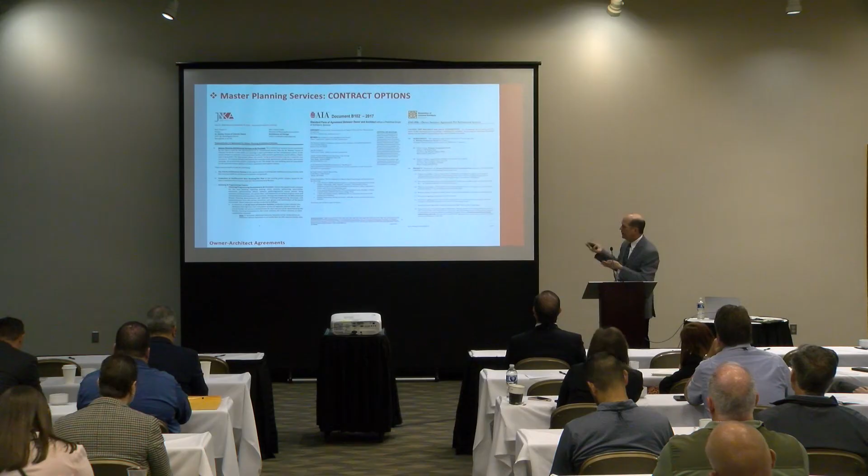But we still do kind of simple letter of agreements for the initial phase, since there's not a lot of liability for master plans initially. These simple letters of agreement are still acceptable to a lot of our church clients, and dioceses for that matter, in some cases.

And then in terms of range of fees, I wasn't planning to show this, but I thought it might be helpful. This has just been our history and how fees have evolved, but it all really depends on the level of service, the number of design review meetings, whether there's a reserve study or facility assessment, whether there are town hall meetings, and whether you need animations and 3D renderings. So it's really quite a range.

The one in Kansas that involved cost estimating consultants and preliminary engineering, we were at $75,000 for the whole process, but most are in the $20,000 to $30,000 range for most of our parish master plans.

And then the time frame is typically 3 months minimum, but in Indianapolis it ended up being like an 8-month process because of a lot of the meetings up front that we mentioned, to get all those groups involved and get feedback from that initial visioning phase, which I think was 2 to 3 months before we even started design. We then had 4 design review meetings, and the cost estimating was very thorough. So it ended up being a total of an 8-month process to complete that master plan.

Does that include legal zoning processes if you have to get approval? No, it just includes our summary of whether a variance will be required, or any challenges code-wise or zoning-wise, which are summarized. And that's what this next phase goes into, this is just one of 5 phases of a traditional design process. But the zoning approval typically happens during the design development phase.

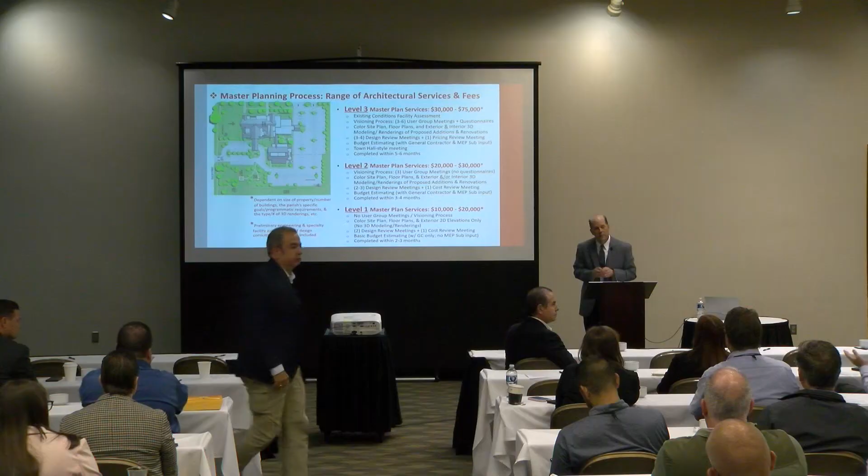Yep. Can you go back to the slide prior? Just a question that goes along with it. You said that in the past, the sweet spot for collaboration and committee... Right, our advisors, when we started building committees, we always say the sweet spot is 5 to 7, and 9 at the most.

When you get down to the stakeholders and the users, we have each one of those building committee members assigned to that group, whether it's the teachers, the parents, the mission officers. Otherwise, they get unruly.

Thank you for presenting. They're close in line with what we have in our architect. The question I have is, when you do one of these levels, level 2, so now the extreme level, 3 levels, and you start off with an anticipation of a 2 to 3 to 4 month design process, and then it turns into something that becomes 8 months. What is the fee difference that you see in additional services when we get to that point?

We have, I think a number we've used before, like $3,000 for one more meeting with some of the design revisions to prepare for that meeting. And in some cases, we have town hall meetings as another a la carte. If you want to have multiple ones, another one later in the process might be an additional fee. So to have that kind of a la carte as things evolve, we think we want this alternate design or additional town hall or whatever it might be, stakeholder meeting.

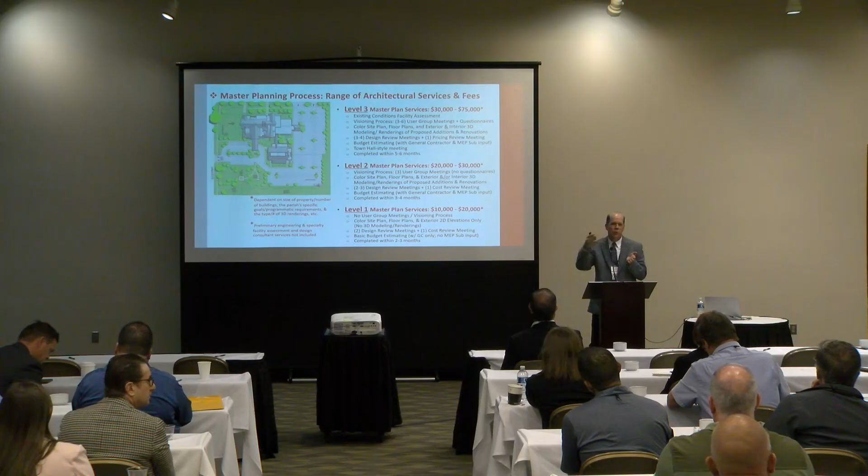We have tried to limit it to about 3 phases, just realistically. But if it's got a full reserve study or facility assessment, that's almost like all the maintenance becomes something they do progressively as the different building projects are completed. That's not really a phase, but something for the parishes to keep track of and keep chipping away at while they build out improvements. But yeah, 3 is typically the max we show—I can't remember when we've shown one with more than 3 phases. All the examples I showed were 3 phases, in fact.

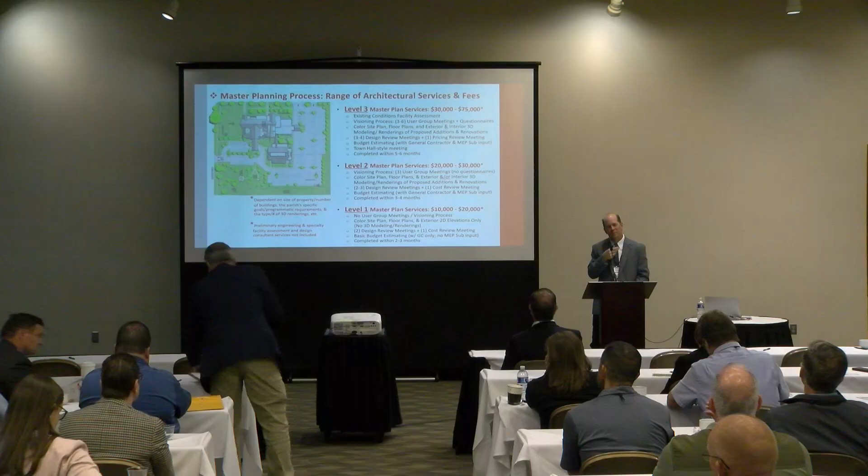If it's over 3 phases, how many years does that span? If it's 2, 3, 4 years, your price goes up. We always have those escalation factors—the estimators we've worked with on a couple of these were using 5% per year. We had traditionally used 3%, but we always defer to the contractors or cost estimators we're working with because they know much more about where the industry's going.

When you're doing basic budget estimating, obviously you've got numbers in mind, and you're trying to maybe...

Good question, I can probably help answer it. A lot of times the MEP is what ends up—the mechanical, electrical, and plumbing—because that's overall in a construction budget, your MEP is in the 20-something percent range of the overall building.

As far as foundations and steel, we can track that cost percentage. But when it comes to mechanical systems, that gets tricky because we're talking about big spaces with very extended use, and engineers have to design it to a certain code, whether the church is half full or completely full. That's also why we really try to get MEP contractors involved, if not consulting engineers—but we prefer contractors if they're available, interested, and have a chance of actually doing the project, because that's the most important thing.

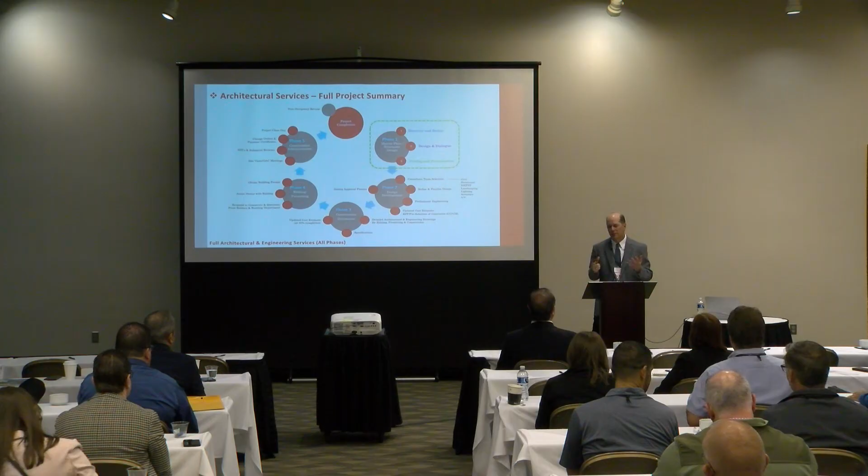Okay, what else? Oh, so here's a simpler breakdown from a percentage standpoint for each of the phases of the full design process. Again, this initial master plan and schematic design phase typically is in the 10 to 15% range of the full project percentage in terms of the level of our services.

And with Revit, that's kind of been growing. We've been shifting our fees a little more toward construction documents, just because of the amount of time it takes to build the model and input all the information - there are more detailed drawings earlier with the introduction of BIM over the last 10 plus years in our case.

One of the things we like to do in the Archdiocese of Miami is when we hire an architect to do a master plan and schematics, when I negotiate that architect's fees, I make sure I get a credit from the architect for the master plan. For basic services, when I negotiate your basic services, I want to get a credit back on the schematic. Absolutely, and that's always a line item in our estimates - you credit the applicable portion, because the visioning, you could argue as an architect, isn't part of traditional basic services. So we always negotiate what part of that master plan fee is really schematic design and what part is additional. But yeah, that's a great point.

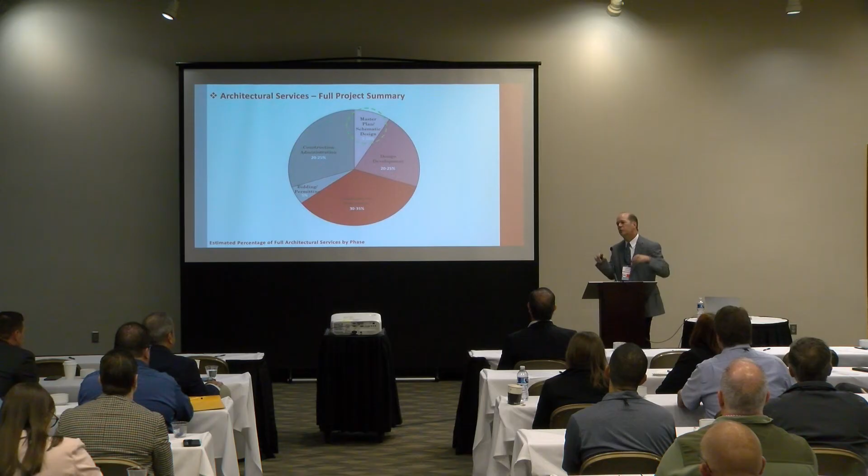Yeah, anybody else have any other questions?

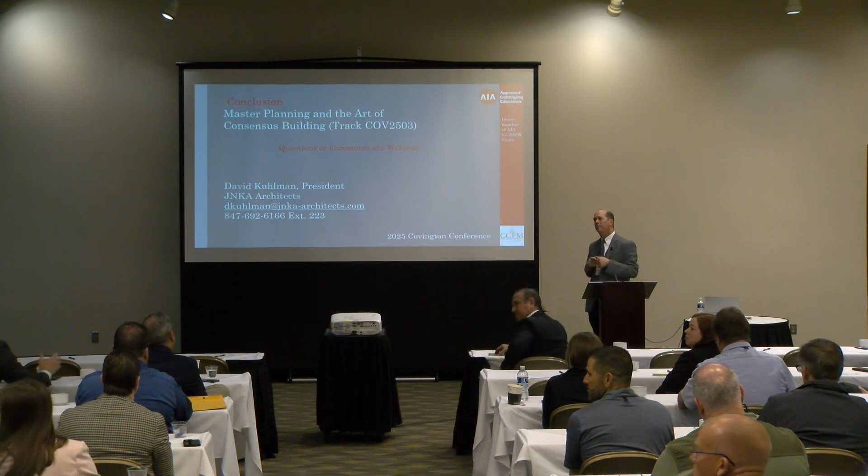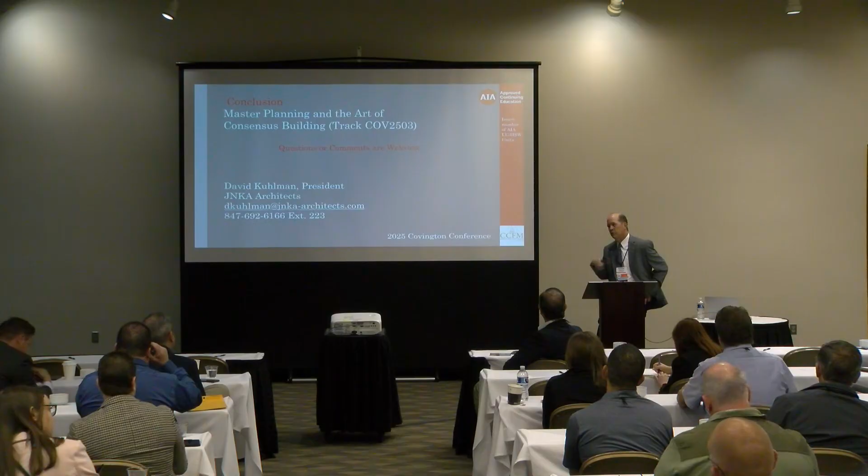Talk about when you're doing the master planning and laying out the parking lots - are you using code or your experience, and how many stalls do you end up with? So laying out parking lots, we have to provide the parking per the zoning analysis we do during the master planning process. In some cases, if a civil engineer is involved, they'll do more detailed circulation drawings - not just parking, but turn lanes, making sure it meets fire access requirements for the radius of fire trucks getting to every part of the site they need to reach. But conceptually, in early design before we get the engineers involved, we'll do basic site plans showing how we can accommodate all the parking required for the project. More specifically, asking whether code requires this amount - what does your experience say, do I recommend code, do I recommend a percentage?

It's very rare that we can meet code with parking, as many of you probably know - that's typically a variance, there's just no way there's enough. And then also the impervious requirement for paving and stormwater drainage - it's hard to meet both requirements for site design. That's typically a challenge, especially for significant additions to churches or new churches, to meet zoning requirements. That's one of the things we identify up front, that we're going to have to get a variance for one of these as part of the process, and we have to allow for that fee-wise, time-wise, and hold on going too far with the design until we get that zoning approval. So that's part of our job, to inform our client of that step if it's going to be a challenge to the project.

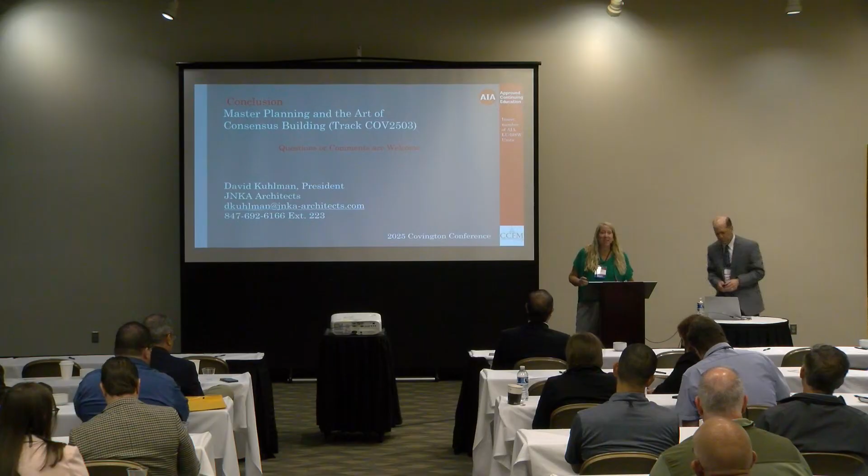Yeah, it's a great point. All right, I'm going to come up here. We want to thank David - if you could give him a round of applause, please. Especially since you said it's not your favorite thing to present to larger groups, so we appreciate it. Hopefully that wasn't obvious. No, it was all good, it was great.